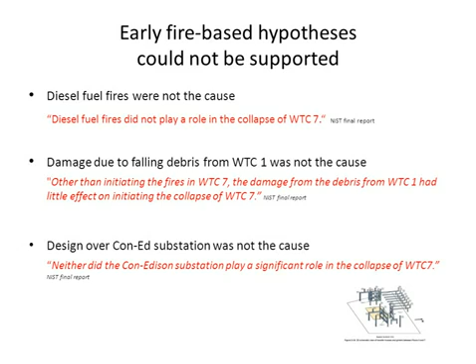For years, NIST promoted the hypothesis that diesel fuel fires, driven by diesel fuel tanks located within the building, had caused the collapse. But NIST abandoned that hypothesis in its final report. NIST also suggested for years that the damage caused by falling debris from the North Tower was a root cause of the collapse of Building 7. Ultimately, NIST gave up on that hypothesis as well. And contrary to some media reports, the building design was not an issue either.

The NIST investigation began in May 2002, and NIST put out an interim report on Building 7 in 2004. 2 years later, in 2006, NIST's lead investigator made it clear that they had little or no idea what happened to Building 7. We might wonder how anyone could have predicted this building would collapse, given that 4 years into the investigation, government scientists had no idea what happened.

But in 2008, NIST said that what happened to Building 7 was obvious and that science was behind a new explanation. We're going to take a close look at NIST's final theory and discover for ourselves whether or not it is obvious. But we should remember that it is entirely computer-based. NIST did no physical testing at all to support its Building 7 report.

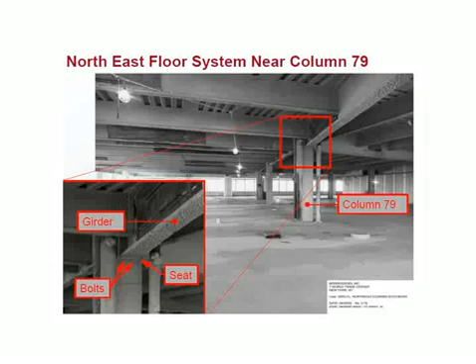Here's a photo of the area showing the critical column, column 79, that NIST said first failed in Building 7. NIST says fires on the northeast corner of floor 12 heated the ceiling that included the floor beams for floor 13, causing thermal expansion of the beams, which caused the girder at column 79 to fall off its seat. NIST says that column 79 buckled due to the loss of support from that girder, and then the whole building collapsed in a matter of seconds.

Here's a diagram that shows NIST's view of how the floor beams on the northeast side of the building, shown here as purple lines, pushed against the critical girder. The girder connected column 79 to the external wall at column 44. The girder to column connection is blown up in the inset diagram, showing how NIST envisions that the girder was pushed off its seat. On the bottom here you can see the pictures that NIST used in its media presentation when it unveiled its final report. The picture is reversed again, but you can see the general idea.

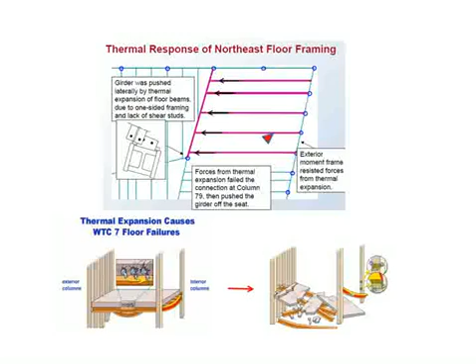The NIST interim report from 2004 said that most of the beams and girders were made composite, or one piece with the slabs, using shear studs. In a deceptive turnabout, NIST did a reversal in its final report and said that no studs were installed on any of the girders.

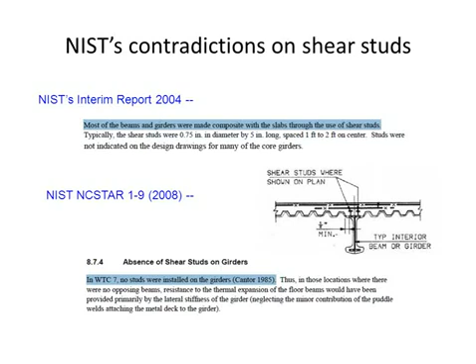Unfortunately for NIST, it was not just its own 2004 interim report that contradicted this vital aspect of its final theory. The presence of shear studs on all the girders was also described by John Salvarinas, the project manager for Building 7, from the company that supplied the steel components. This diagram from an academic paper that Salvarinas wrote in 1986 shows that there were 30 shear studs on that critical girder.

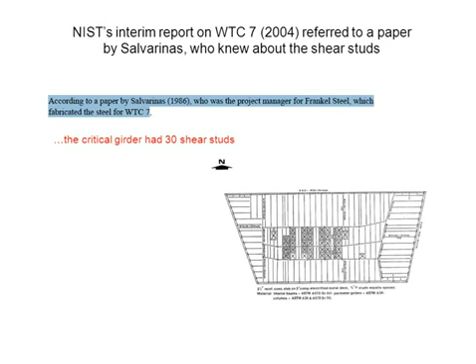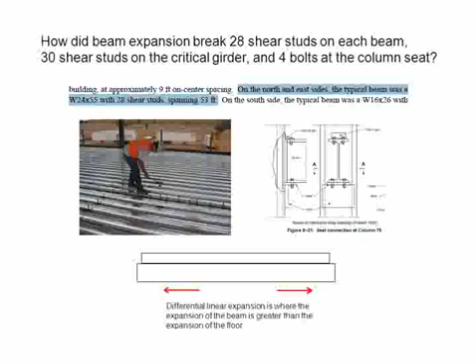These building professionals reported that they had actually done physical tests to see what thermal expansion would do to floor assemblies. These were just the kinds of tests that NIST should have done. Because they had actually done the tests, the Australians were able to state that the shear studs would not fail, because in a building fire the floor slab was heated as well, and the entire composite assembly would expand together. So NIST's final theory is at odds with actual experimental evidence from the testing of real floor assemblies.

Another thing we need to understand is just how far that girder would have had to be pushed for it to walk off its seat, as NIST suggests. NIST reported that the seat at column 79 was 11 inches wide, and therefore the girder had to be pushed at least 5.5 inches, or half of that distance, to walk off the seat. You can see that claim here in an excerpt from NIST's report.

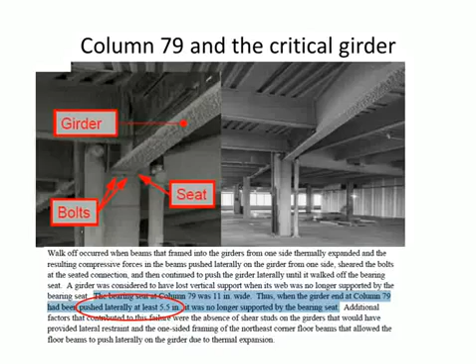To repeat, NIST's final initial failure mechanism for Building 7 was that the critical girder was pushed 5.5 inches by the expanding floor beams. The 5.5 inches was needed in order for the vertical web of the girder, and therefore the center of mass of the girder, to move off of the seat.

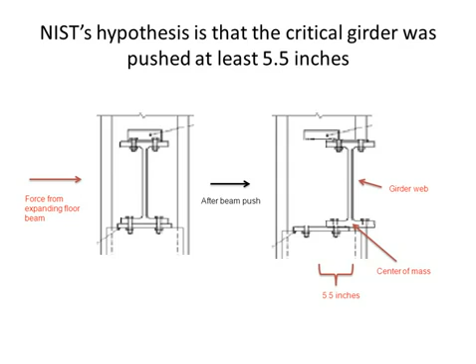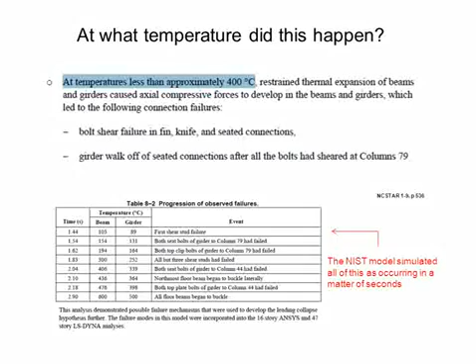Because thermal expansion is a function of temperature, we need to know what temperature NIST says the beams reached, so that we can estimate how much they expanded. This was a tricky question for NIST because at temperatures as high as 600 degrees Celsius, the steel will lose strength and stiffness, and therefore not be able to extend into the girder. At the same time, if the temperature is not high enough, there wouldn't be enough expansion of the floor beams. What NIST settled on was the idea that the beam temperatures reached 400 degrees Celsius on the northeast corner of floor 12.

On this slide you can see an example of just how tenuous NIST computer models were with respect to reality. NIST's computer model had all the steel heating to extreme temperatures and all the bolts and other connections breaking within a matter of about 2 seconds. This is an example of how NIST computer modeling was not realistic.

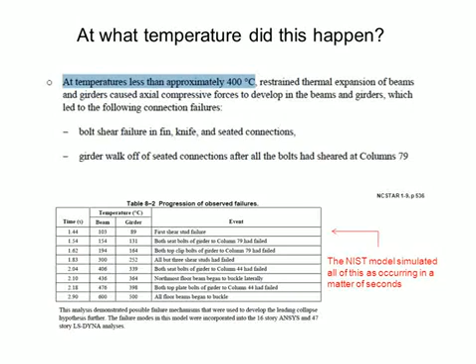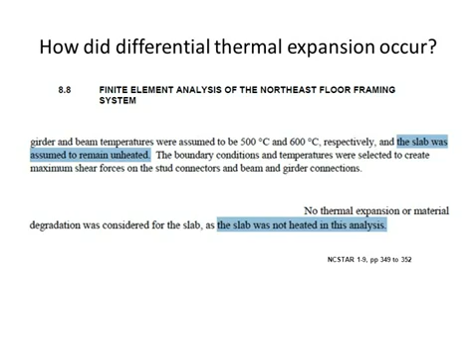Once the temperature distribution needed for its theory was settled, NIST found a way to suggest that the differential thermal expansion could be possible, at least in the computer. They simply didn't heat the floor slab in the computer model. This is what most scientists would call fraud. But NIST's theory has more problems than that.

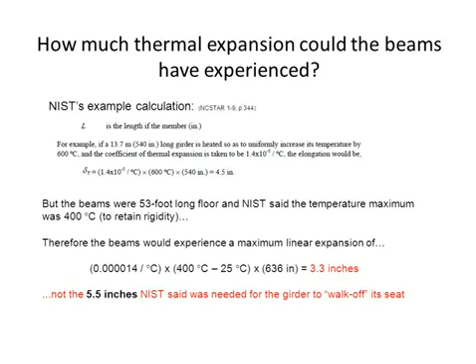Given this temperature scenario, the amount of expansion by the beams would not satisfy the amount of expansion that NIST said was required, or 5.5 inches. NIST provided an example of the equation that scientists use to calculate thermal expansion. When we put the correct values into the equation, we see that the maximum expansion would be only 3.3 inches.

And as we already know from NIST, 3.3 inches would not be enough to cause the girder to walk off its seat. We know from the physical dimensions of the girder and the seat that the girder would have had to be pushed at least 5.5 inches for NIST's very improbable scenario to even begin.

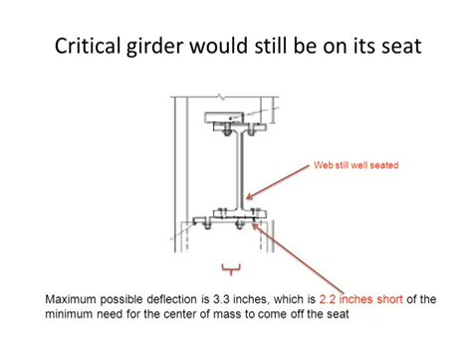Another thing NIST said was that there were 7-hour fires in Building 7, which gave the impression that the fires were very long and very hot. But early photographs did not show fires on floors 11 through 13, where NIST said the first failures occurred, until after 2 o'clock. And the building fell less than 3.5 hours later, so there could not have been 7-hour fires.

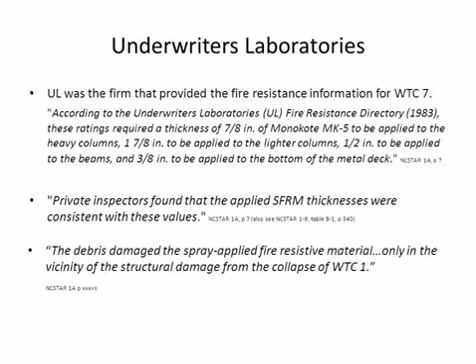Underwriters Laboratories provided the fire resistance information for Building 7. There were requirements for fire resistance of the columns and floor steel in Building 7, just as there is for any skyscraper. The requirements were that these steel components had to withstand 2 to 3 hours of intense fire in standard tests.

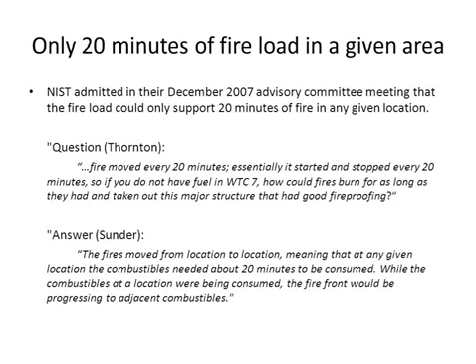NIST admits that its models did not use, quote, the observed fire activity from photos and videos as a model input, unquote. Again, this is not science, and this is another example of why the NIST report is false.

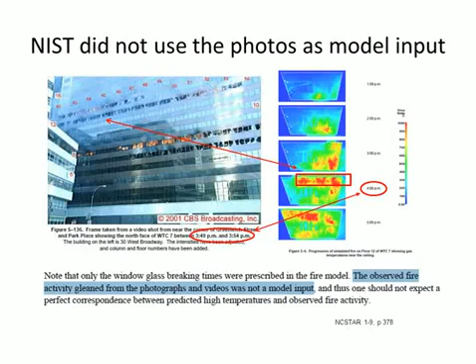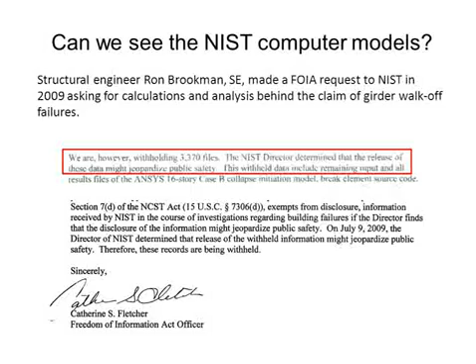Regardless of the fact that the NIST World Trade Center 7 report is false in many ways, we would all like to see how NIST reached its conclusions, but we're not allowed to see those things. NIST tells us that release of that information might jeopardize public safety. But our safety has actually been jeopardized by NIST itself and its lies about what happened at the World Trade Center. NIST failed to explain why and how Building 7 collapsed, and a new investigation is needed.